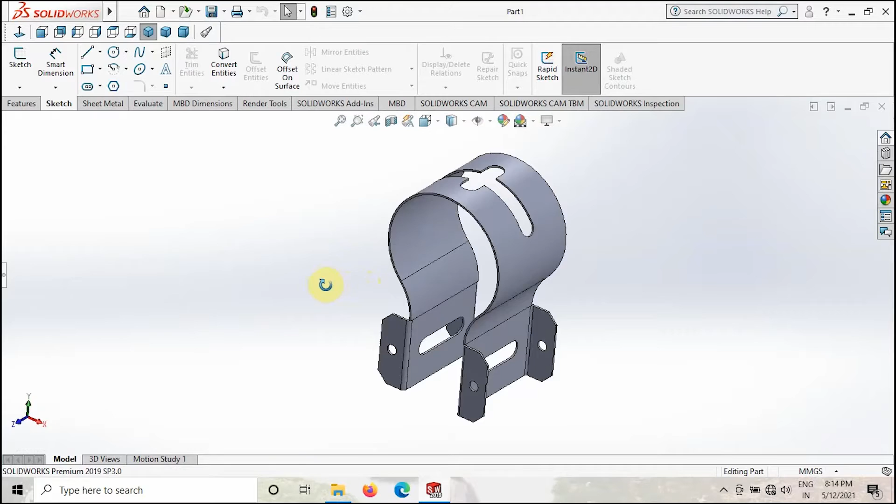In this video we will learn about how to make this sheet metal mounting bracket. Without any delay, let's get started. I will close this window now and I will start with the new file. Take the part as a new template and click OK.

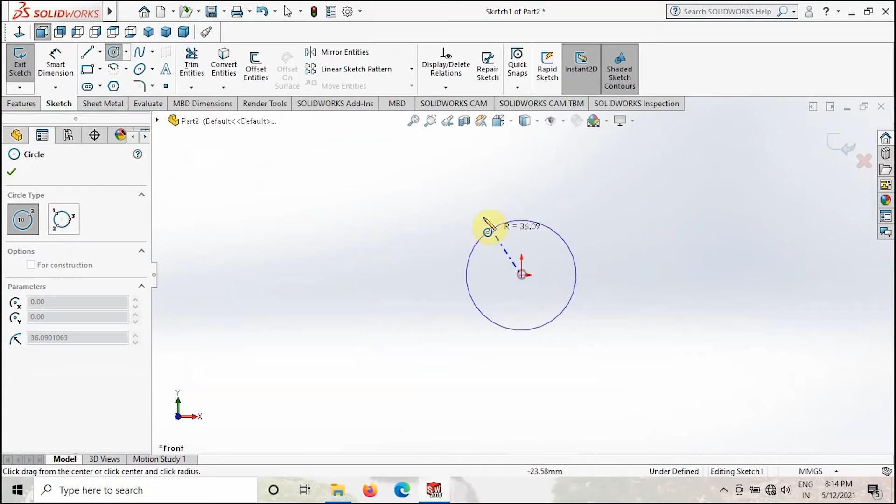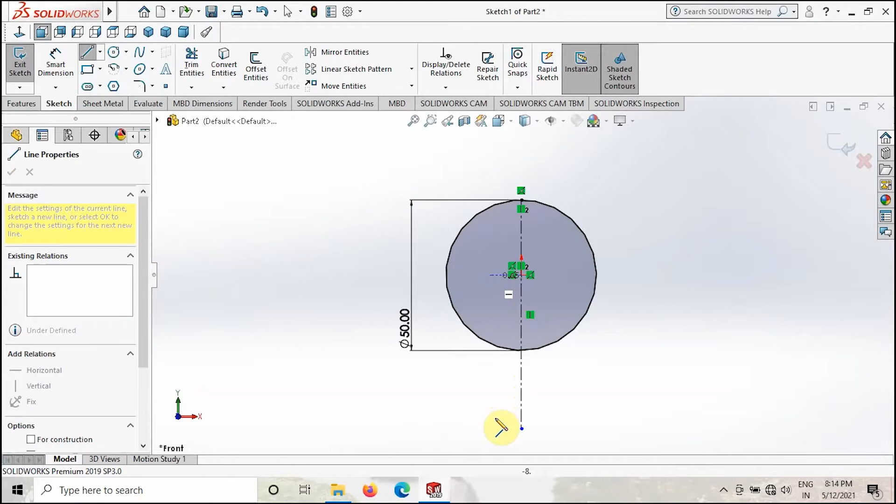Once you get this window, go to the front plane and go to sketch. Then create one circle like this and give the dia 50 mm. Then take the center line and create one center line like this, and then go to line and create one vertical line like this, and then give the dimension from center to this point 60. Then give this width as 12.5, then give OK.

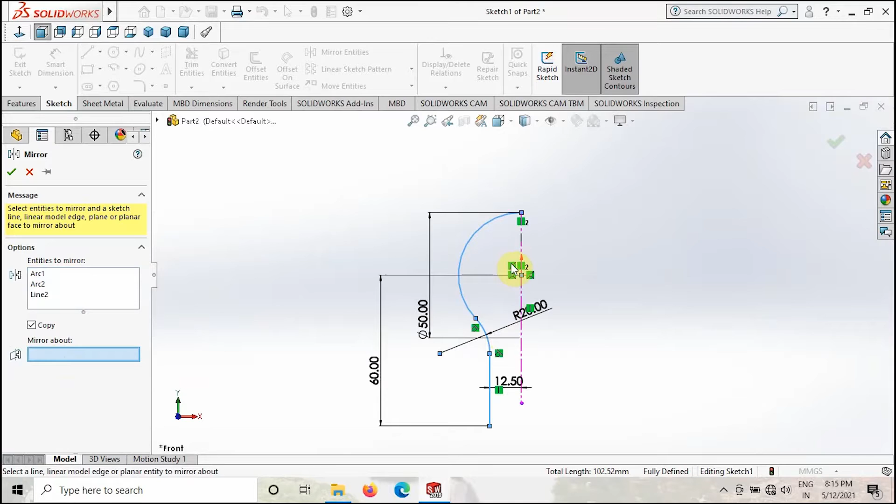Then trim the extra lines like this and go to fillet, give the fillet here and give the value 20 mm radius, then give OK. Then go to mirror option, select all these sketches, then click the center axis and click OK.

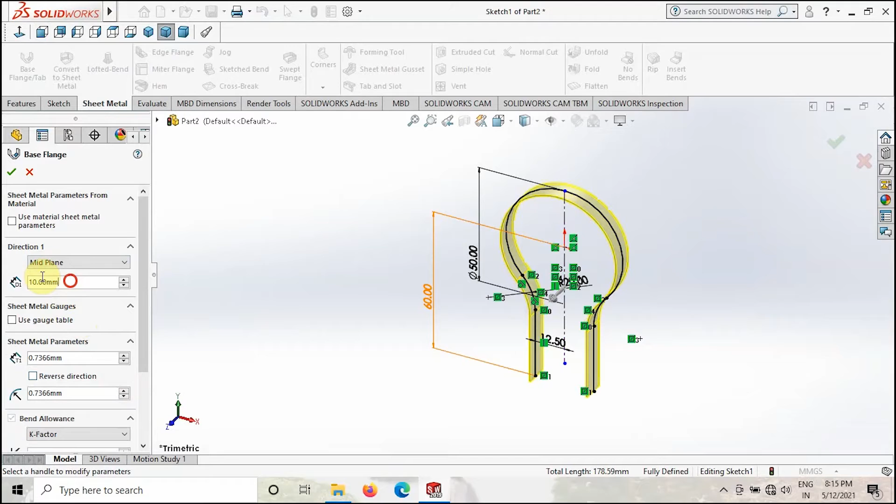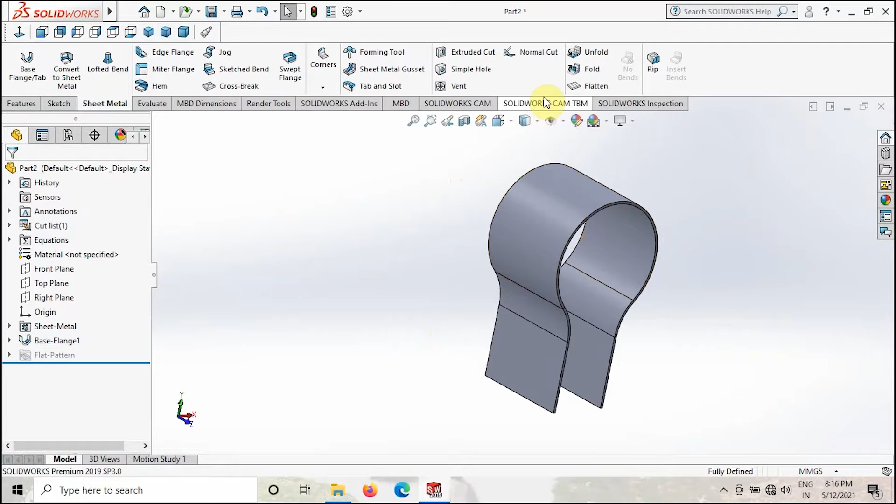After that, go to sheet metal tab, click to the base flange or tab. Now make this option as a mid plane, then give the dimension 40. Then make the sheet metal parameter thickness as 1. Then give OK. Once you create this feature, take the unfold option and select the fixed face as this one, and then select all the bends. Then click OK.

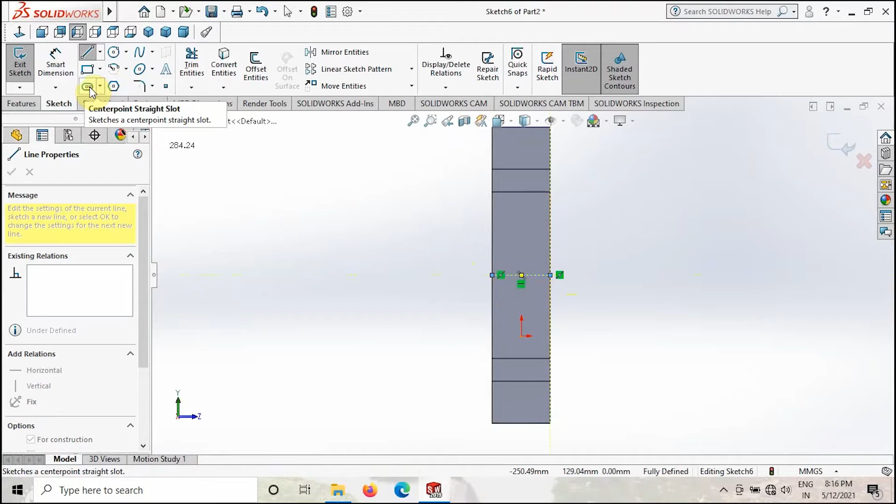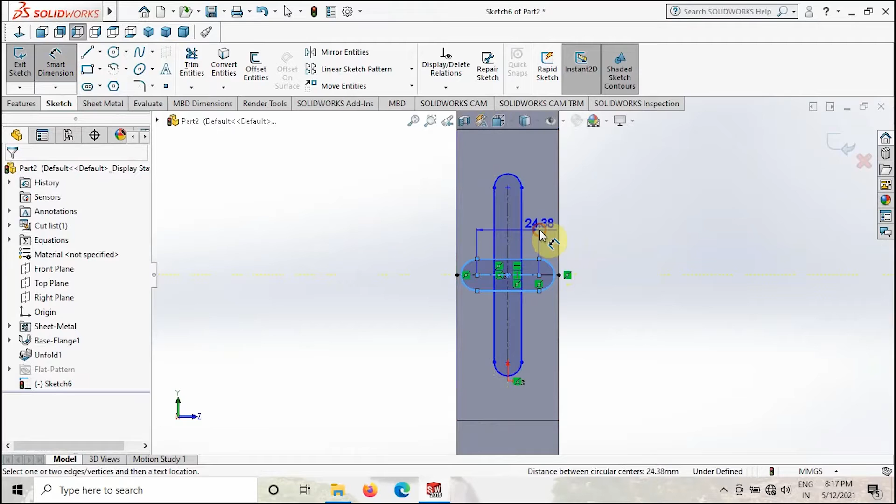After this, click to this face and create a sketch. Go to normal view and then create a center line over here, and then take the slot option. In slot option, you have to take center point straight slot. Take this option, create a slot like this. One is vertical and one is horizontal. Give this dimension as 15 and this dimension give it 7, and height you give it 50. Then this width also you have to give 7.

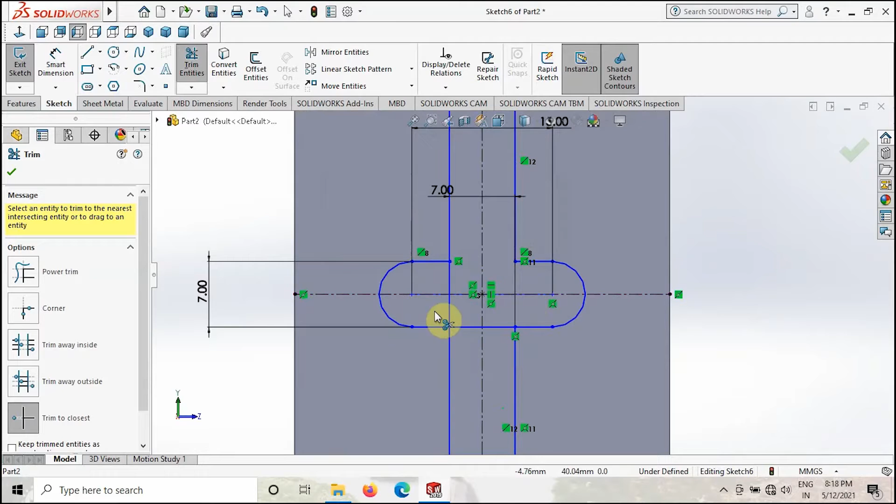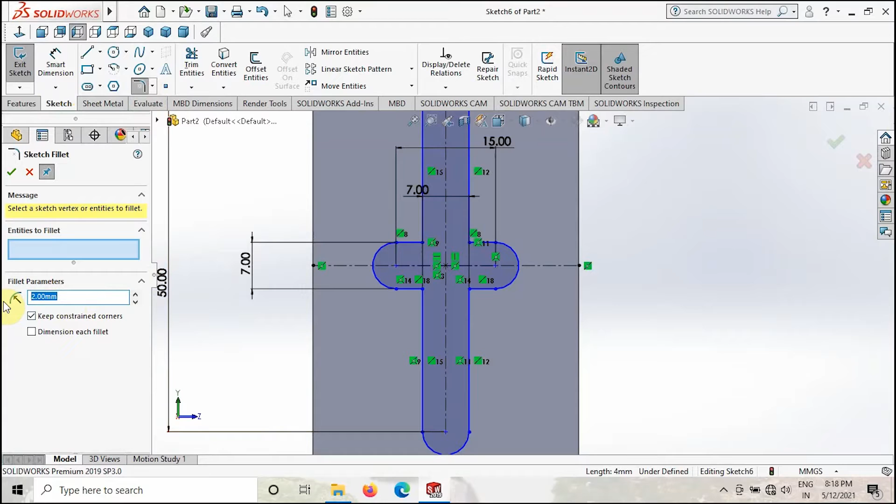After that, trim all these extra lines like this. Click OK and trim all these lines. Then trim this line also. You have to fix the sketch guys, but I am not fixing it now. Just for tutorial purpose I am making it now. You guys have to fix this sketch. Then take the fillet option and give the fillet value as 2 and select these edges. Select all these edges and then give OK.

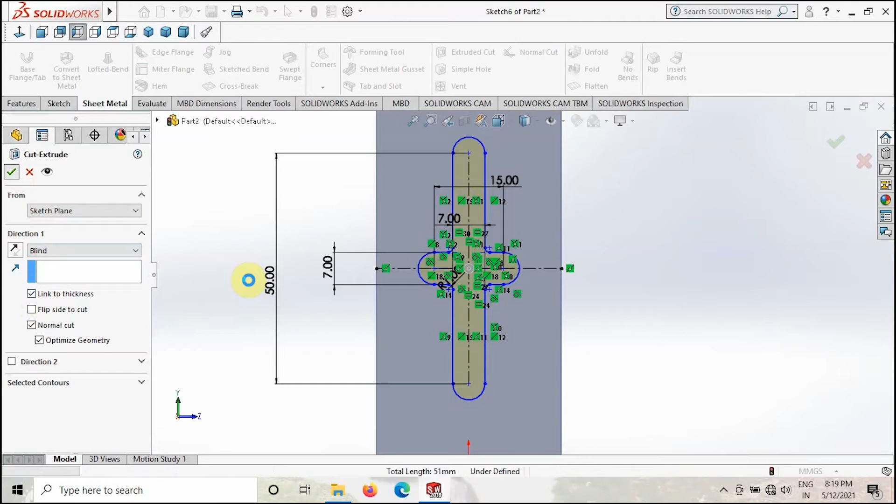After this, go to sheet metal tab and take the extruded cut option. After that, make sure this link to thickness option is checked and then give OK. Once you made this cutout, go to fold option again, select this face and select all the bends, then give OK. As you can see now, we made the slotted cut.

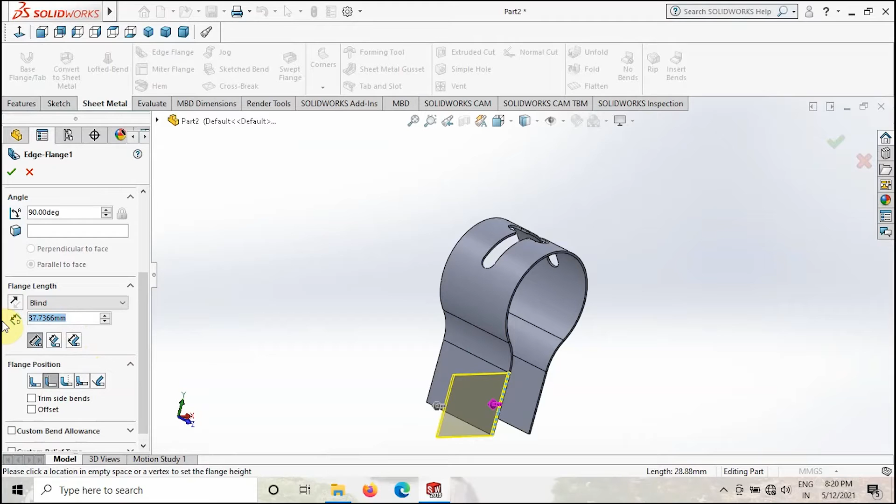Then go to edge flange and make a flange over here. Don't forget to click to this option. We need the second option, material outside, and then give the dimension 12 and then click OK. Same we have to follow for the other 3 sides also. Here give the dimension 12 and click OK.

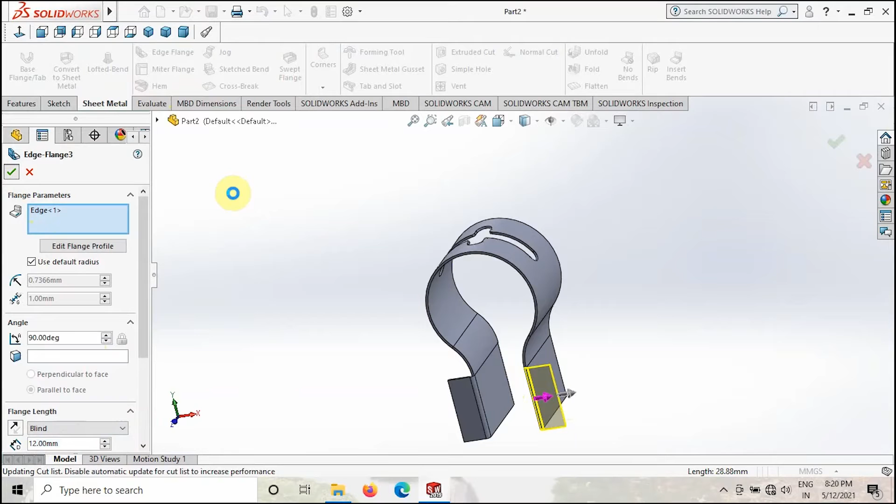After that, take the edge flange again, click to this face and give the dimension 12. Then take the edge flange again and select this last edge. Then give the dimension 12. Make sure flange position option is checked for the second option, material outside. Then click OK.

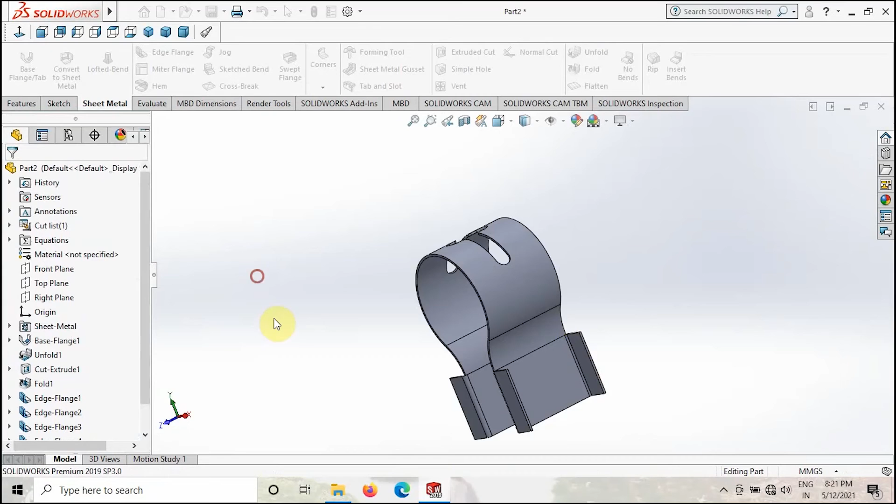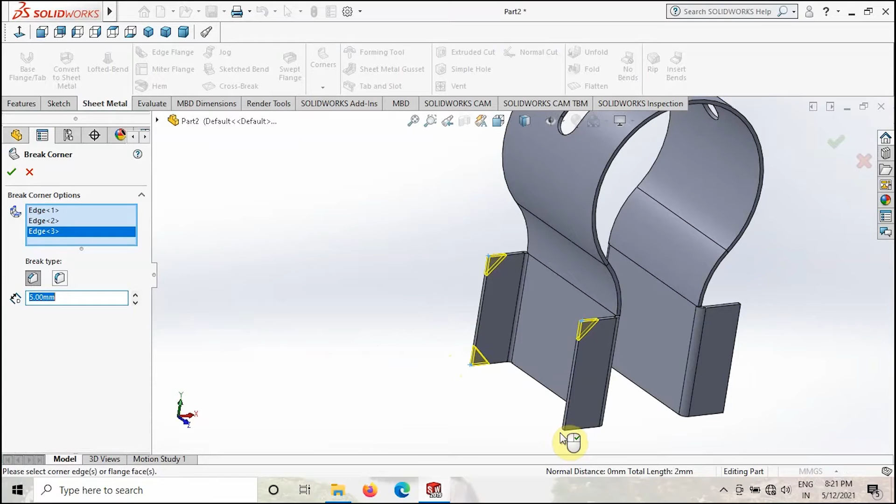After this, go to corners option and then take the break corner or corner trim option. Click to that, click to this chamfer option and then select all these edges like this. Select all the edges, select like this, then give the value 5, then give OK.

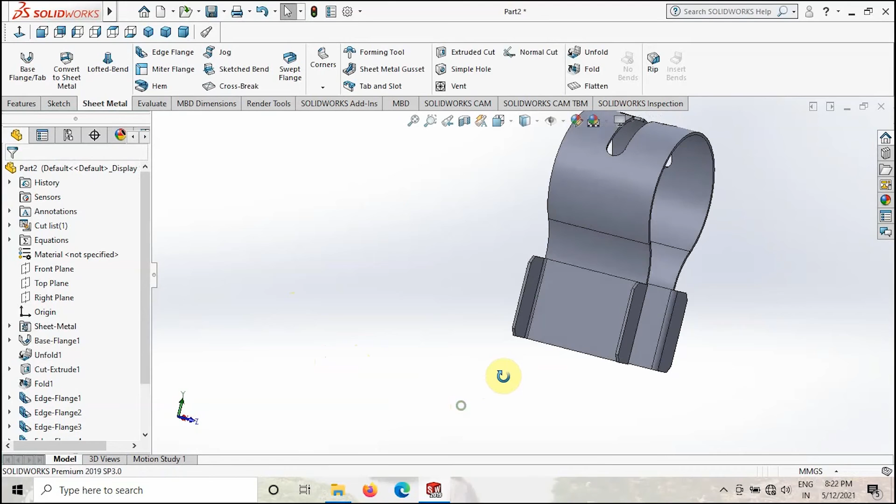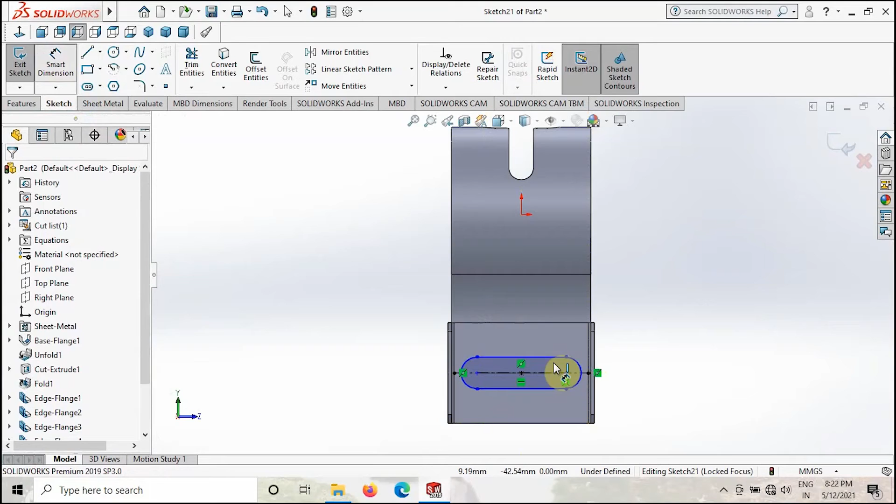After this, click to this face and create a sketch. Take the center line and create a sketch like this. Then go to slot option again, take the second option, then click to the center and create a slot like this. Give this width 7 mm, this length give it 20 mm.

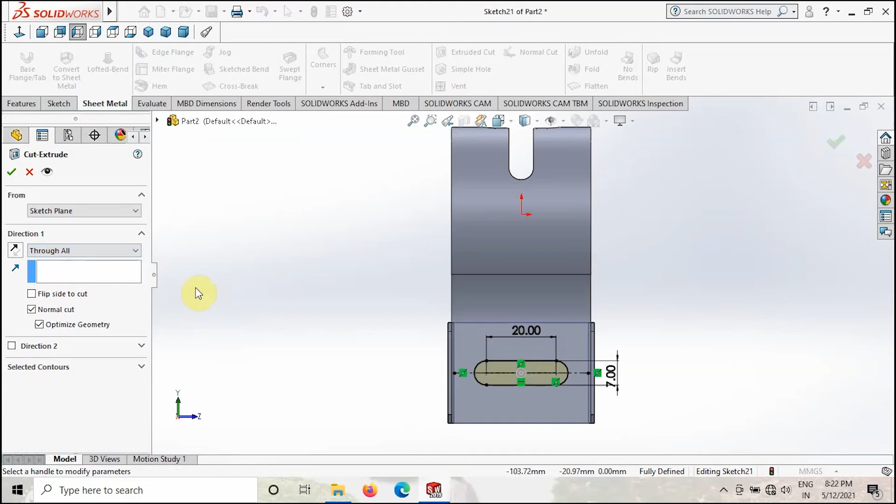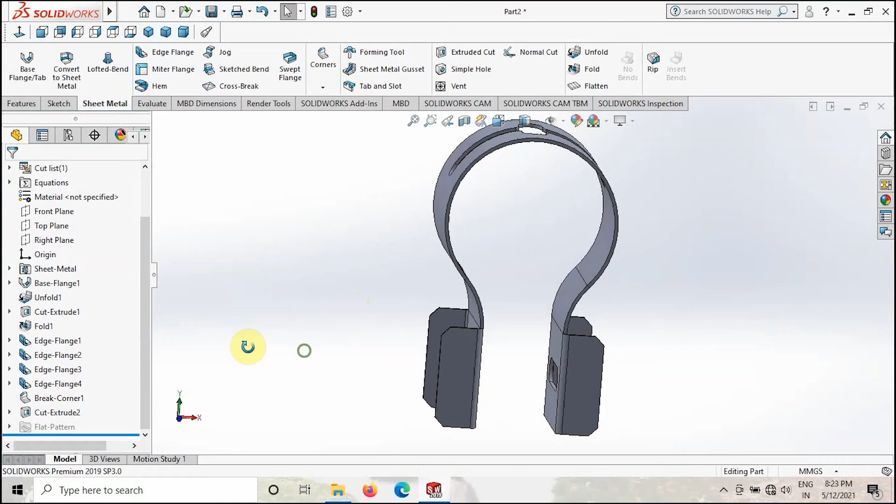Give OK. Go to sheet metal, take the extruded cut option and make this option through all. As you can see, it is cutting the material from this portion to the other side of the material. Then give OK. As you can see, we created the mounting hole. Now we will create a hole here also.

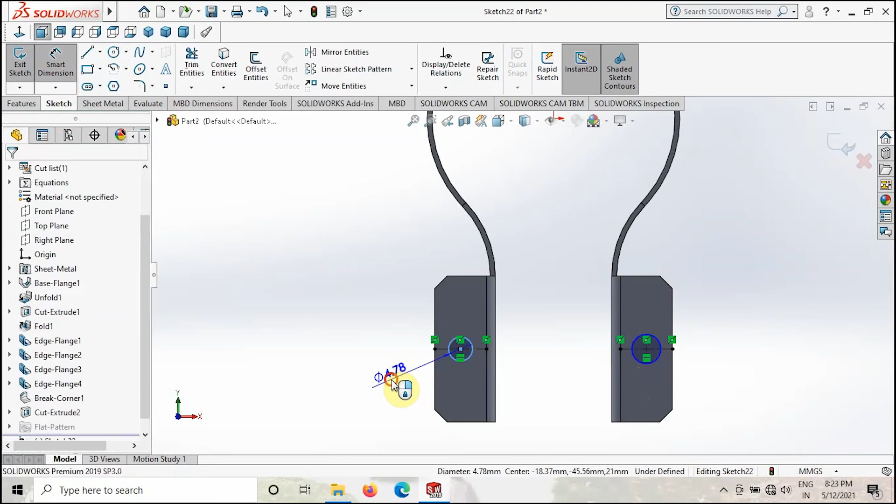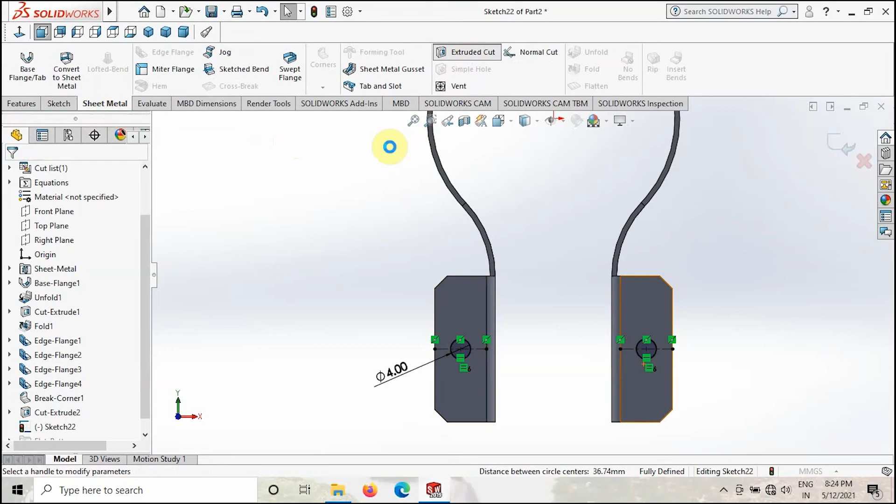Take the center line again, create a sketch like this, again create a sketch here also, then go to circle, create a circle like this, then give the dimension as 4, then select this circle and select this one also and then click to make equal. As you can see, both circles have the same dimension. Then click OK. Then go to sheet metal option again, go to extruded cut option, then select the through all option and then click OK.

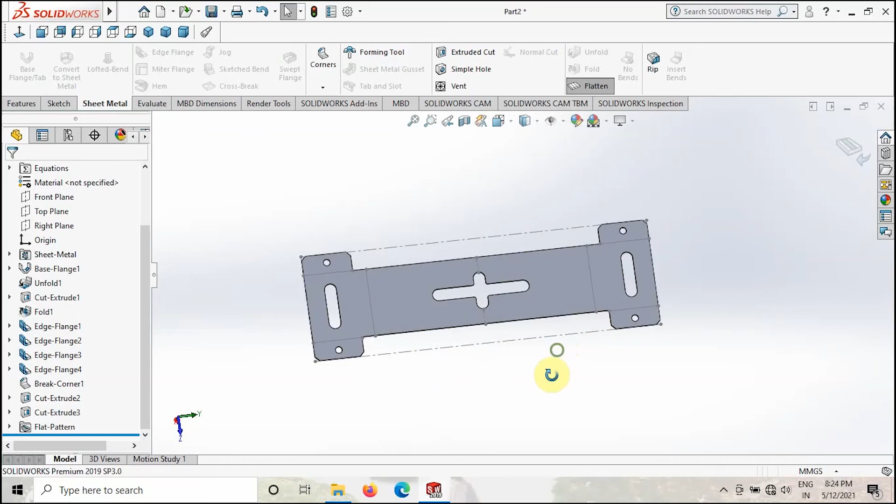After this, we have to create the flat pattern. Just click to this flat pattern. As you can see, this one is giving the flat pattern. That means our model is perfect and we modeled it in a right way. That's all guys for this video. I hope you guys learned this trick properly.